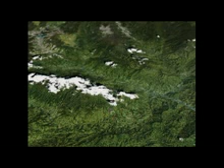The Ulu-Jelai hydroelectric project is located in the Cameron Highlands in the state of Pahang, some 140 kilometers north of Kuala Lumpur. The hydropower scheme collects the water flow of 3 rivers, the Bertam, the Telom and the Lemoi, by means of one main RCC dam and 2 weirs, and conveys it through a system of tunnels to an underground cavern powerhouse with 372 megawatts installed capacity.

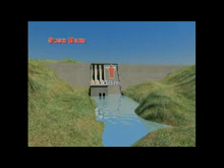The Susu Dam, in roller-compacted concrete, 88 meters high, with an 850,000 cubic meters volume of RCC, will be located in the central valley of the Bertam River and will create a reservoir of about 25 million cubic meters capacity. The 2 concrete weirs on the Telom and Lemoi rivers will be equipped with water intakes to divert the river's flow to the Susu reservoir by means of 2 16 kilometers long transfer tunnels.

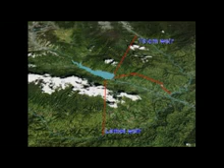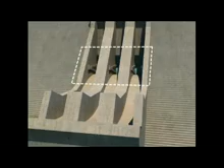The Susu Dam will have a central concrete structure incorporating the temporary diversion works and the low-level outlet sluice, both equipped with hydromechanical gates and the ungated spillway. The intake tower, with 3 power intakes equipped with hydromechanical works conveying the water to the headrace tunnel, will be located on the right-hand bank of the Susu Dam.

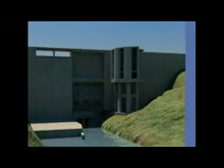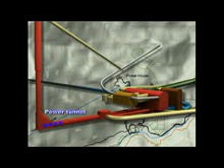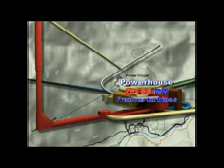The headrace tunnel will transfer the water to a 400 meters high vertical shaft and through the power tunnel and the penstocks to the powerhouse cavern, housing 2 186 megawatts Francis turbines. After power generation, the water flows through the surge chamber, equipped with control gates, to the tail race tunnel and back to the riverbed.

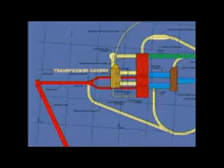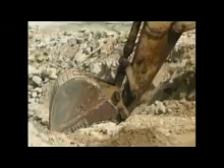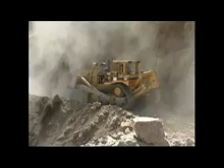The project globally involves about 25 kilometers of tunneling works. The overall volume of external excavations amounts to about 5 million cubic meters, and the total volume of concrete works to almost 400,000 cubic meters. Work is due to commence in May 2011. The time frame foreseen for the execution of the construction work is 62 months, which is in accordance with the employer's requirement to start power generation by July 2016.

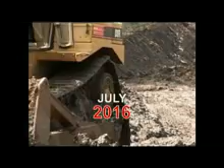62 months is an extremely challenging time frame for such a complex and articulated project. This obliges carrying out construction work on 9 contemporary underground fronts and 5 contemporary external fronts, all at the same time, involving the deployment of very important resources in terms of plant, equipment and personnel, as well as requiring particularly attentive planning of the activities and high skill for their implementation. Even more so, considering some of the significant design constraints and stringent technical specifications that will be further illustrated.

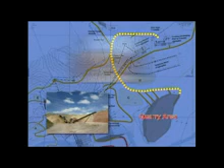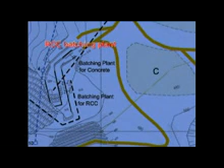For the construction of the Suzu Dam, the quarry, located downstream from the dam toe, will supply all the rock for the RCC as well as for the conventional concrete. The blasted rock will be transported to the crushing plant by means of 40 tons dumpers. A twin-line primary and secondary crusher will crush the blasted rock and feed it through an underground conveyor belt to the tertiary crushing plant for the fabrication of the RCC aggregates, which will be transferred to the cooling silos of the RCC batching plant by means of a system of conveyor belts. Cooling of the aggregates in the silos is necessary in order to meet the RCC temperature requirements according to the technical specifications.

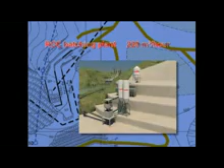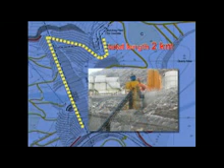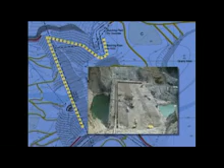A system of conveyor belts with a total length of 2 kilometers will transport the RCC to the dam and distribute and place it in the different areas. According to the technical specifications, transport of the RCC with dumpers is very limited. This implies the use of a quite sophisticated system of distributing conveyor belts, also assisted by movable belts on trucks.

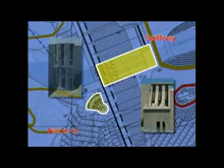For the conventional concrete structures, the spillway and the intake tower, another third crushing plant will be necessary to prepare the aggregates. These will be transported to a batching plant at the dam toe, equipped with an ice plant, necessary to comply with the stringent technical specifications concerning the concrete temperature.